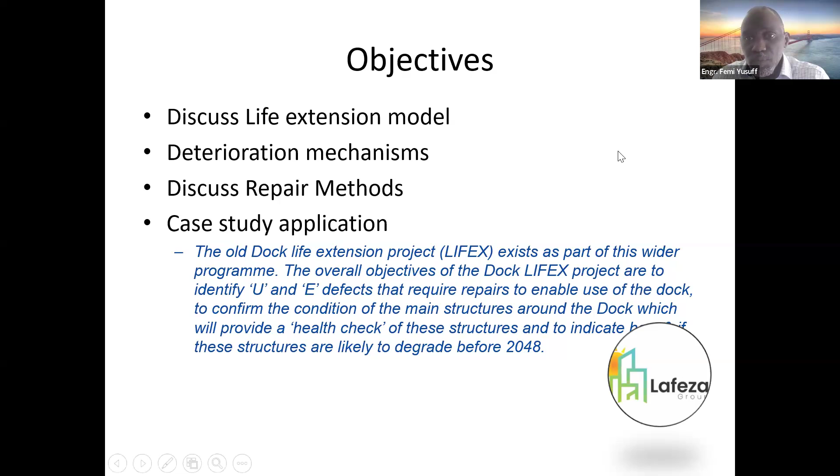But the case study was built in the 70s. It has got to the end of its life, but the client doesn't have money to rebuild it. So they're asking for at least another 20 years extension. And one of the things that was done is to identify the defects and also to label the types of defects before you can provide a solution.

But one of the key things to think about is that usually we always think as if at the end of the project design life, the project has to be demolished and rebuilt. But what we're beginning to see is that there is a direct link between engineering, finance, and the environment. Because you as the engineer will say, well, I'm sorry, this structure has done well, it has fulfilled its design intent, and it should go.

But the people who are paying our salaries and keeping us going say, look, can you think of a way of keeping this structure going? And that is a direct impact and link to how the country and the economy is managed.

Also, maintenance provides another avenue for us. There are times that you may not have a project where what you need is a new design per se, but you need to find a way to maintain it. So what you then find out is a performance and time concept is a very unique model that you will see interfacing. And this is a very unique situation to be in.

Engineers usually like designing something from scratch, building it and handing it over, and then observing from a distance if the design intents are being achieved or what you've modeled is being achieved, because you've implemented load factors from previous data, you've applied loads and you've determined the kind of structure it's going to be, mechanical, civil, whatever. And what you are doing is just observing what you have designed perform, but this is a different one.

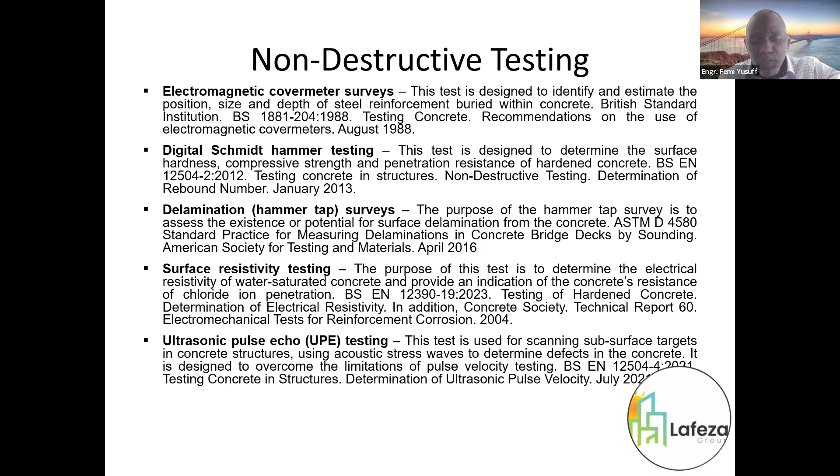Then you move into your intrusive testing. By the time you are getting to your intrusive testing, you already have an idea of how degraded the structure is. So your carbonation test, for example, is a specific test to estimate the depth of carbonation, because maybe you already feel, yes, there's carbonation going on because the concrete strength has reduced maybe by 10%, 15%. So of course carbonation is going on, but you want to know the level of carbonation.

So we have a code such as BS EN 14630 2006, which is products and systems for protection and repair of concrete structures, test methods, determination of carbonation depth in hardened concrete by the phenolphthalein method, November 2006.

Then you have the chloride ingression. Like I mentioned, chloride ingression is very important. You also want to check how much chloride is being absorbed.

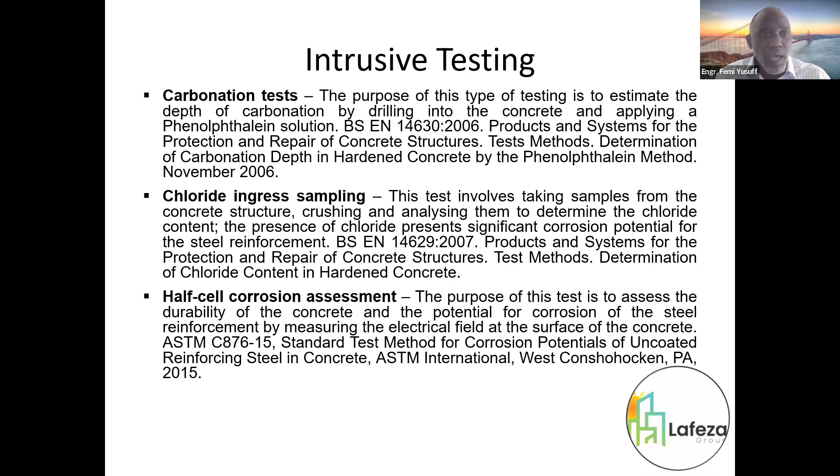Then the half cell corrosion assessment. Now, when you do those first two tests in the intrusive test and you realize that the concrete cover has given way, the concrete is not as strong as it was, and you are seeing some reinforcement exposed, and not just exposed, but looking rusty, it's important to then say, okay, that means you may not have the same diameter of reinforcement that was designed for and placed in the concrete. You then do your half cell corrosion assessment to check if the steel is of the right capacity.

I'll show you one of the theoretical models we picked up, a very popular one from two professors who have done quite a lot of work, and it has proven effective.

So the selection criteria of the elements from the viewpoint of corrosion durability is what you do first. If you follow the way I've been presenting, you'll see we started from a general perspective of the building of the structure. Then we went into saying, okay, how are we going to test? Then you look at, initial, without even doing anything major, just having a physical field, your pneumatic Schmidt hammer test, your observation, and then you're going to test. Then you do a risk analysis, because you don't want to go down the route of an expensive repair.

Once you do your risk analysis, you do your carbonation test, then you can assess the residual life to say, okay, the client has asked for 20 years. We think from everything we've seen and the analysis, what we have left is 10 years. How do we get the additional 10? Then you determine the assumed and required minimum service life.

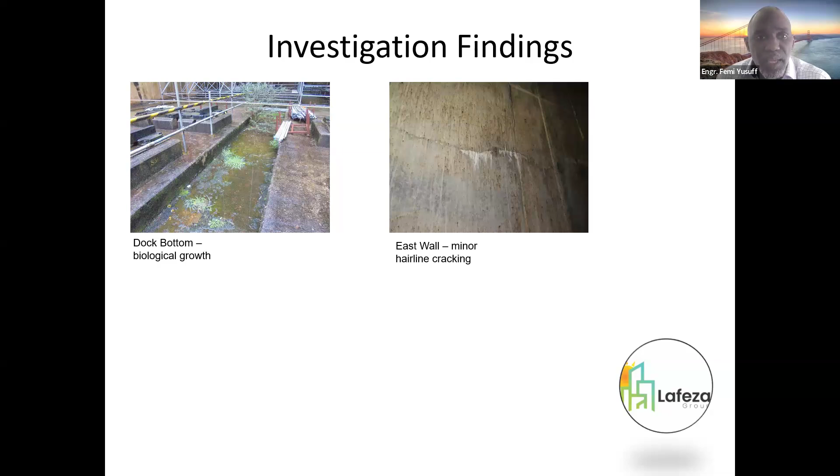But for the wall to my right, there is a hairline crack going on. So there will be a need to check what is causing that. Is it that the loads have increased on the deck of the dock? Is it that there's pressure? What is causing it? So that will require some investigation. If you look at other things that are going on, you can see what I was talking about.

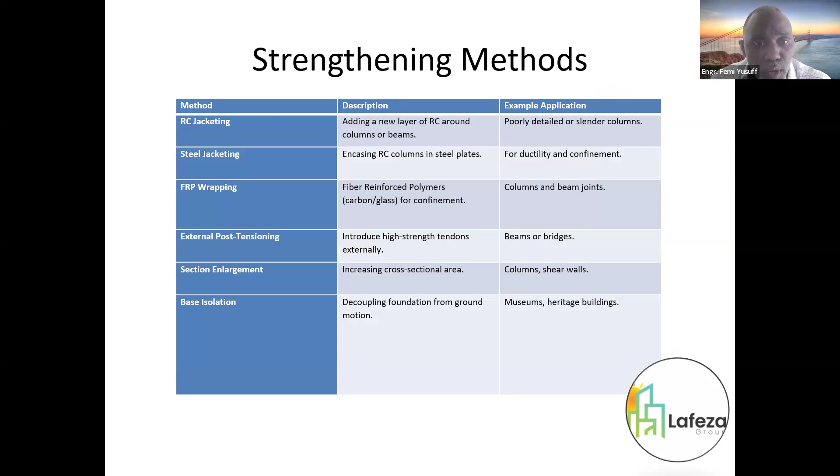So then the remediation methods, if the concrete has cracked, if there's loss of concrete, if it's a minor defect, what we have done is to enumerate the different remediation proposals, and we have categorized each type of defect such that the repair is uniform across the structure, across the element.

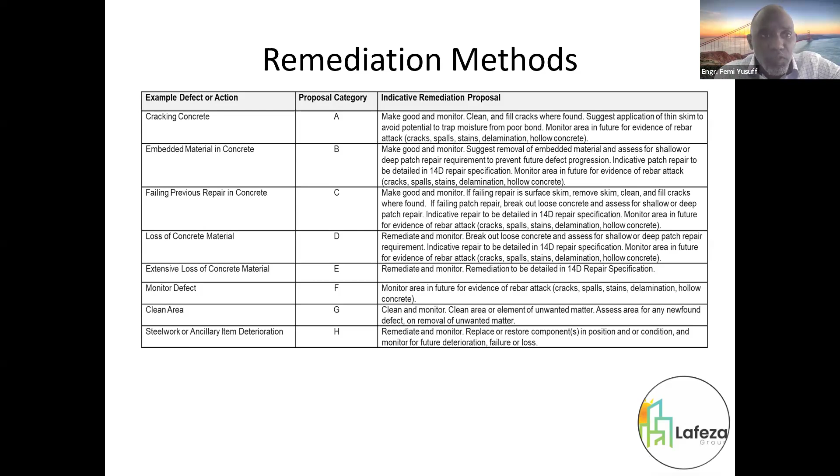For example, if it's just a minor defect, it's to just continue to monitor over time to see if the deterioration will get worse. Look at that last one, steel work or ancillary item deterioration. The solution is to remediate and monitor. And if you remember, I was talking about that steel column earlier, it says replace or restore components in position and/or condition and monitor for future deterioration, failure, or loss, which is exactly what I was saying. In that particular case, you could look at whether a retrofit would work, or whether you should just remove that column and replace it. Such scenarios will come up.

Others, some we need just minor repair, some we need a deep repair, some we need a shallow repair. And for the concrete types, because we understand concrete very well, we know the way concrete behaves. Concrete failures will typically be cracks, spalling. Spalling is just the concrete cover coming off naturally, and then instead of a smooth surface, you see the honeycomb and the concrete hardcore. Reinforcement corrosion is typical. Delamination, failing previous repairs. So repairs have been done, and it continues to fail. Foreign objects in concrete, honeycombing, blowholes, reduced concrete cover, etc.

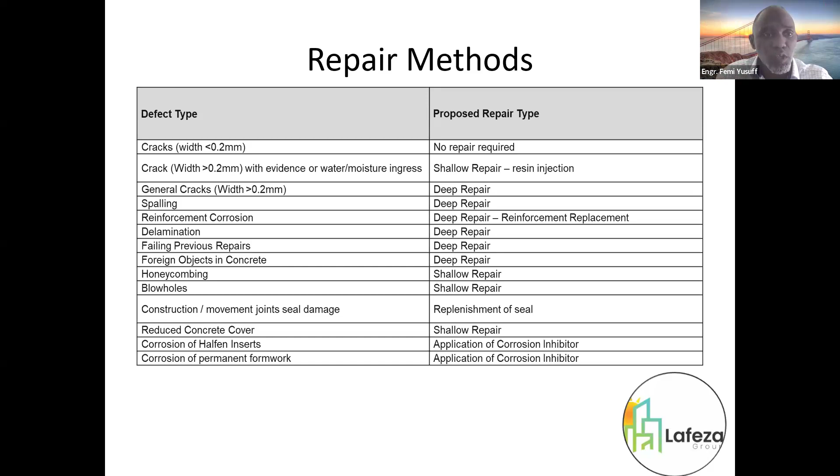And the proposed repair methods are enumerated. The advantage of this is that it reduces the worry about how you are going to implement a repair method, because you have stated it. So all you then do is identify the types of repairs and list them.

And then there are repair stages. I won't spend too much time here because it depends on how you want to go about it. But basically, there will be an assessment, identification, then you have to decide the type of method, like I discussed in the previous slides. And there are many codes and standards that can help us do that. We have clause 4 of the European standard. We have clause 5 and 6 of EN 1504. And then EN 1504 part 2 up to EN 1504 part 7, clause 6, clause 7, and clause 9 of that standard are very detailed and very good.

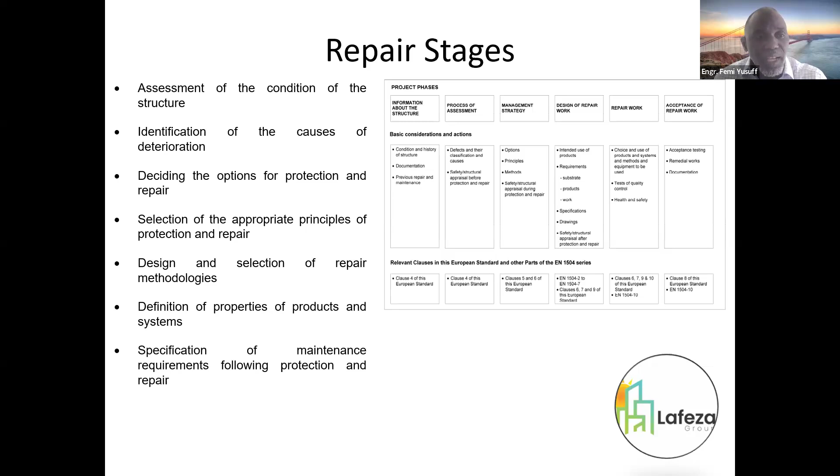Most of what we are doing are guides. So if you find yourself in this situation and you're an engineer or a technical person, the advice is that you do your own further reading, because you may find out things that will work better for your project. But at least you have a guide on where to go in the first instance.

So at the end of most of this work, the methodology and strategy and structure, you are going to get an extended service life. You're also going to get improved structural performance, because imagine a dock wall that was designed with maybe 50 megapascals concrete strength. It's resisting on the outer side a sea height of maybe 1.2 meters, which has risen over time because you expect that to increase. And internally, it will have the mooring forces of the ship, etc.

And then maybe there's a subway on the inner side and things like that. So you have all those forces that have been designed on that wall. And then suddenly, that strength has dropped maybe by 10% to 30 or 35%.

That means the reinforcements in that wall are working a lot harder, and in some cases might even be failing, but you will not know. So some of the cracks we're seeing on those walls could be a result of overstressed detailed and placed reinforcement. So when the improvements are done and the strength is back, you see the concrete performing better, which could even be part of the solution you need.

Then you have effective project capital utilization. What I mean is that there's always a budget each year for capital projects, and most times there's a fight over where to deploy this capital. If you can improve certain structures, there are better chances other projects will be done. But if there are critical structures like bridges that are about to fail, you rush to those, and projects that should be done each year are left undone, and over time it could become a challenge.

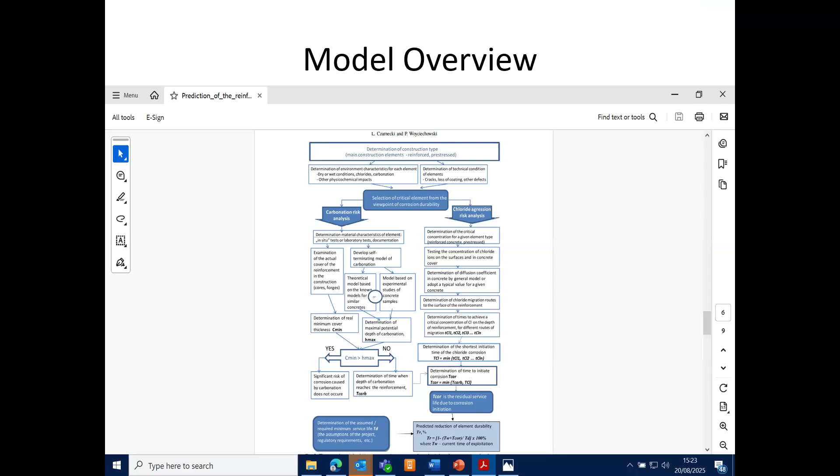And what advice can we professionals give in that line? Because if we all say it doesn't concern me, you don't know who may be driving around that area that the pile will give in. So that's my question.

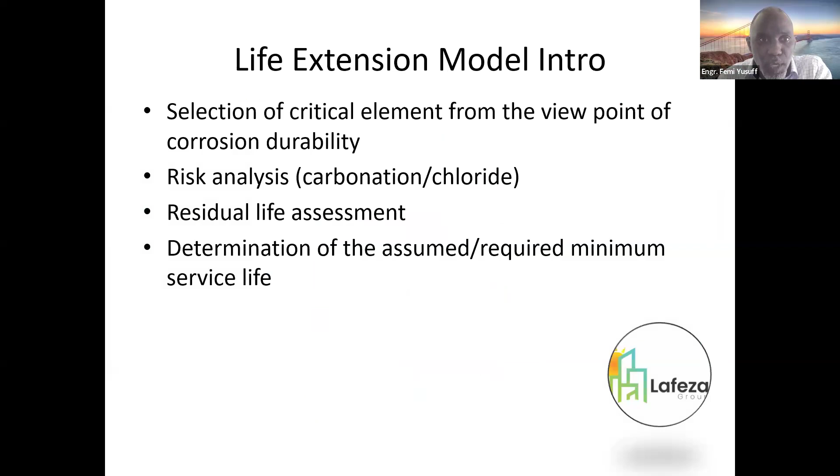Yes, thank you for this question. It's a fantastic question because it's very similar to this problem. A sheet pile will be exposed to similar problems. I'm trying to find the slide where I spoke about this, yes okay, these two slides explain your question. If you look at it, everything here, the sheet pile will experience, because it is in the ground, alkali-silica reaction. In fact, all structures will have that, but in different grades. For the sheet pile, it is worse because it's very close to the sea, so water will always get to the pile, and then it will increase the challenges.

And then I expect that when the concrete for the sheet pile was produced and constructed, it wasn't a normal type of cement that was used. Probably a sulfate-resistant cement was used in that concrete. However, it doesn't mean that it is foolproof. In the sulfate-resistant cement, there's what is called C3A, which is reduced below a certain percentage to reduce this sulfate attack. But it's likely going to be there. Carbonation and chloride ingress will occur naturally, either internal or external.

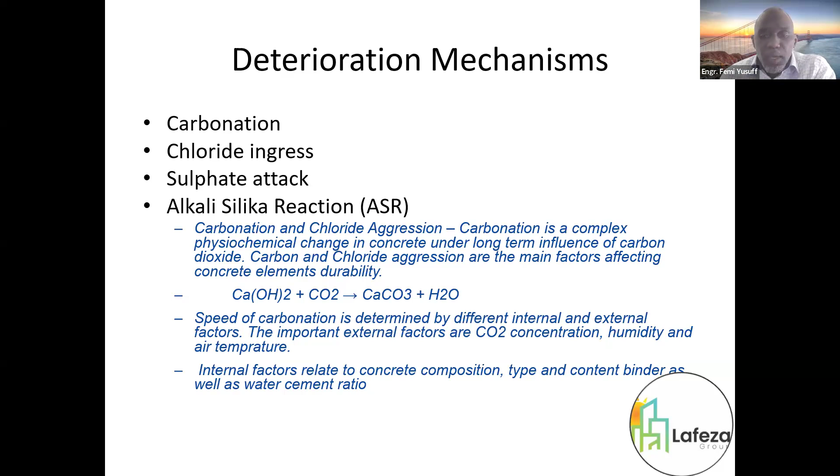So to answer your question, I think this slide is what will give the first clue to whether there's a problem or not - by the year it was constructed. That's one of the powerful things about being an engineer or concrete scientist: if you follow the scientific or structured method of how the concrete was constructed, you know the expected lifespan and can estimate when challenges will start.

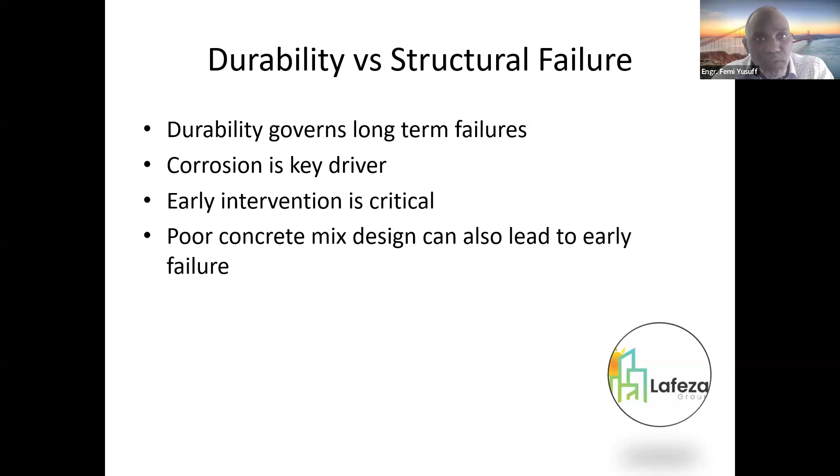So for those sheet piles, when were they constructed? What is the environment? What do we expect? If, for example, those sheet piles were constructed 20 or 30 years ago, they are due for what I'll call the initial non-intrusive physical observation and assessment, just to see what is going on. And then this procedure can be followed.

But what is also key - two things that I always say are important: the design life and the environment. So if the sheet piles are going to maybe halfway of their design life, and the environment is a challenging, aggressive environment like we have, logic says you will not have the same quality control. You can imagine when those sheet piles were being constructed, thousands of sheet piles, you will not have the same quality.

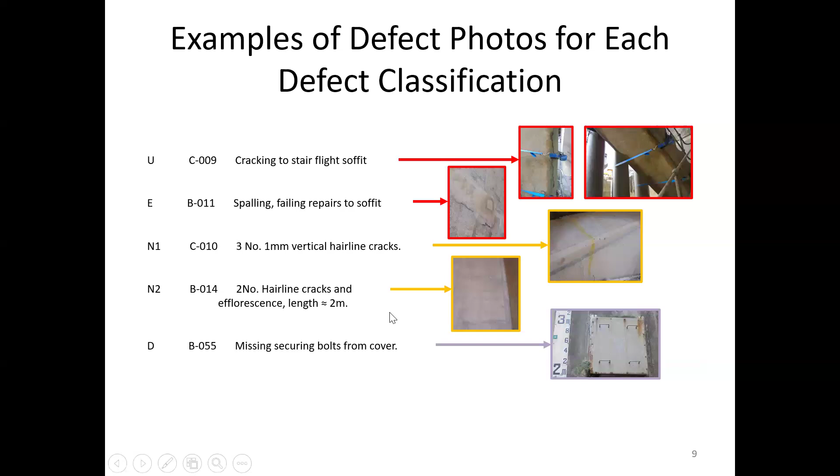Thank you very much. So, ma, please, let's probably take steps towards advising the appropriate authorities so that at least it will be our contribution to our collective welfare and safety in Lagos.

Thank you very much, Engineer Balogun. I will just check again.

There was a time we went to Marina on industrial visits, on a technical tour around the ongoing bus terminal. I know work is going on there, and we were taken around the Marina shore, but I know there are many more of such. So we need to check back on the rehabilitation work at the Marina terminal, not only the Marina in Lagos Island here. There are many marinas around Lagos, so I'll check that. That's to show that somebody is looking at it in government, and work is being done, money is being disbursed for rehabilitation, but I'll check again.

Thank you for raising that. Thank you.